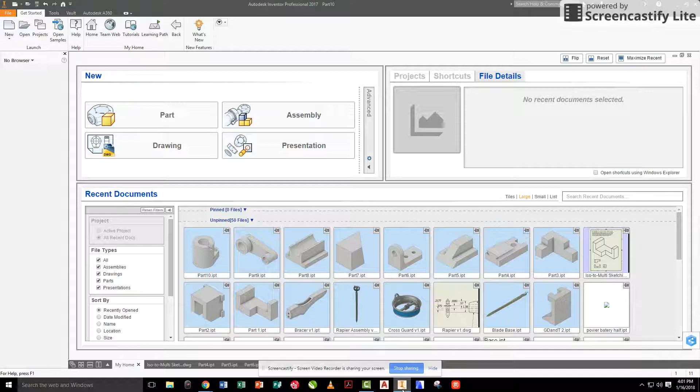Hi, right now we're going to walk through a couple things for class. We're going to do a couple of our early parts, an Inventor exercise for you. First thing we're going to do is talk about extrusions. Now extrusions are parts, so we're going to start with just some basic parts.

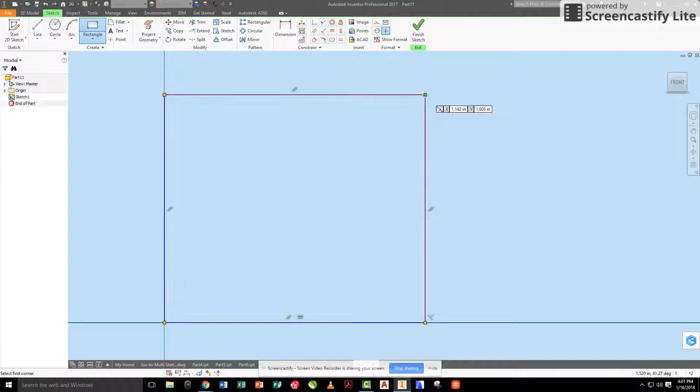I've gone to my desktop and opened a standard part. First thing I'm going to do is go to my start sketch and pick a plane to draw on. Today, all I'm going to do is draw a 1 inch by 1 inch cube. I'll click right here, start one corner on my origin, and drag it up. I'm pushing my mouse wheel down and dragging to pan, so I'm just going to drop this in. I don't care what size it is right now because I'm going to put a dimension on it. So I get my dimension tool, put a dimension out here, and tell it exactly 1 inch and exactly 1 inch.

There's my square. Now I finish the sketch and want to extrude it. I simply close the sketch, go to extrude, and tell it to be a 1 inch cube. Boom, there, done. Now if I want to fit it on my screen, I hit zoom all. That's all it takes to do an extrusion.

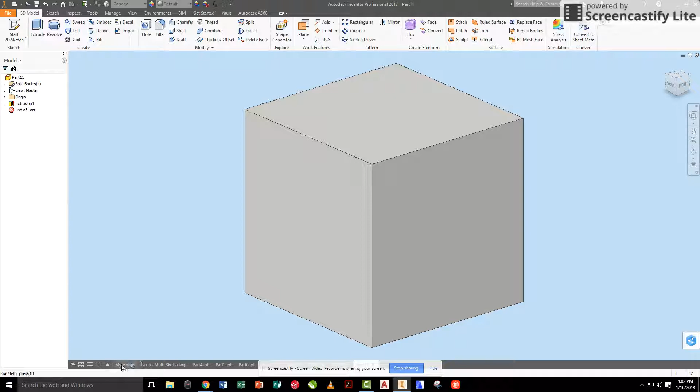Now let me redo that one more time. I'm going back in here to my home and I'm going to do another part, same process, just a different shape. So I'm just going to click on a plane and pan down so I know what I've got to work with. And I'm going to draw a line that goes from right here out this way, then back up here somewhere, then back down here to where I started my origin. Okay, so there I've got it.

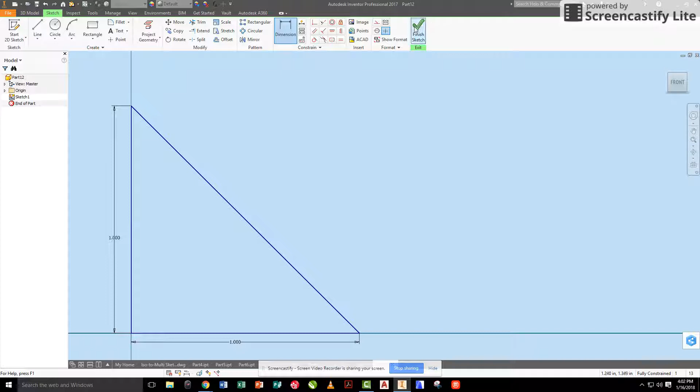Now I'm going to put some dimensions on it to control it. I'm just going to make this exactly a 1 inch by 1 inch right triangle. Now when I finish the sketch, the next thing I need to do is zoom all, then tell it to extrude. It's the only shape there, the only thing it can find, so I just made a 1 inch by 1 inch right triangle prism. Now, that's all it takes. If I want to zoom out and show it all on my screen, I can.

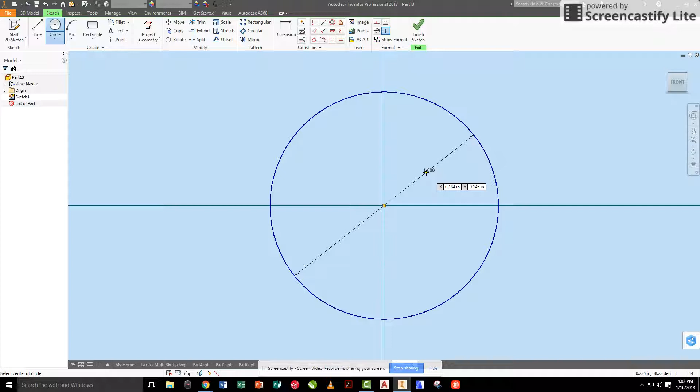So one more time, we're going to make a cylinder this time, same process. Part, start a sketch, pick a plane. Now for cylinders, I put the center of all circles, if it's my base drawing, on my origin. So I'm going to make this 1 inch in diameter, finish the sketch, and extrude it. It's going to be 1 inch long at the default setting. I can change it any way I want, I can type it in, I can drag it, whatever. Hit OK, there it is. I've made a 1 inch by 1 inch cylinder, 1 inch diameter, 1 inch long.

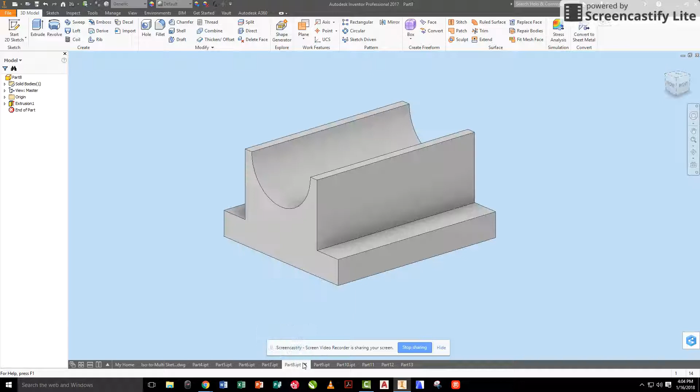Now if I go back down here to my parts list, I've got part 12 right there, that's my prism; part 11 is my cube; part 13 is my cylinder. Now I've made some other parts down here that I'll be using for some of our class discussions. I've basically made up some I've seen in the past, or variations of them, stuff I've seen in old textbooks and drawn in school. So we're going to be drawing this stuff and making orthographic views from the isometrics of it, but we'll probably also be modeling some of them just like this. So they're relatively straightforward and easy.